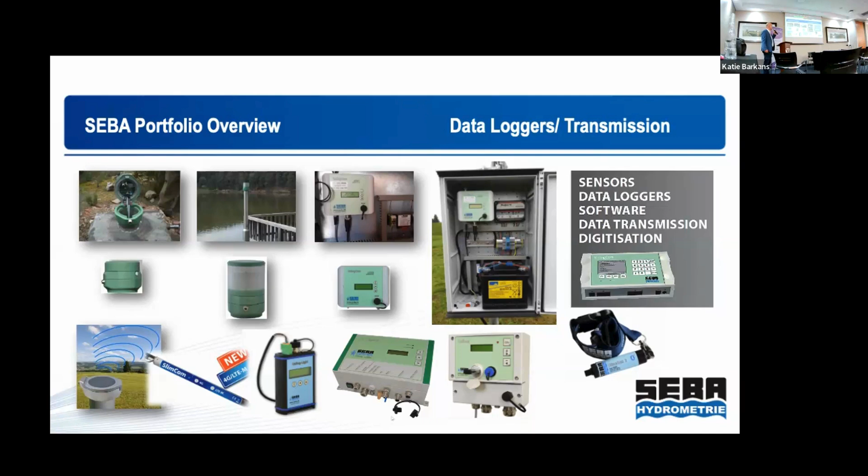We supply the entire chain of mobile and stationary equipment for hydrological regime, including different data loggers for the individual task, which all go back to the same core. So the software for configuration, etc., and operating the systems is common software for all of them. We work with World Bank, United Nations, UNDP, KfW, FAO, etc.

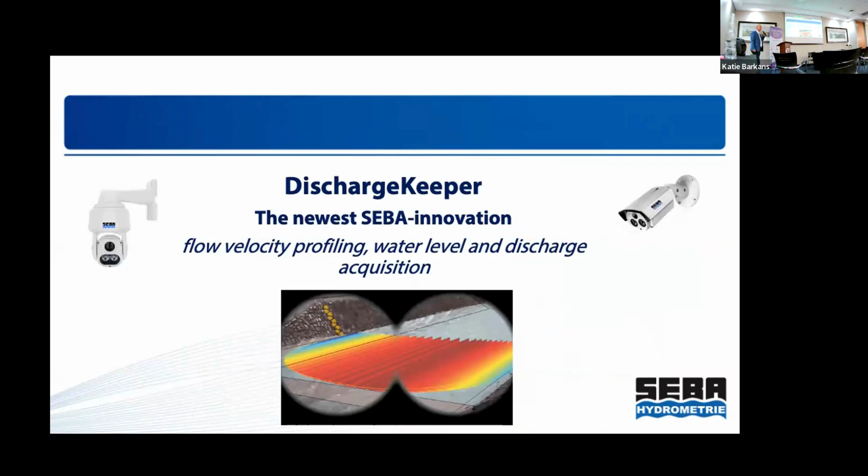The presentation today will be for a new system, a new innovation of our company, where we use a camera to execute the measurement of rivers, and we do one measurement in one step, which means detection of surface velocity as well as water level. And by observation with the camera, we detect the structure on the surface.

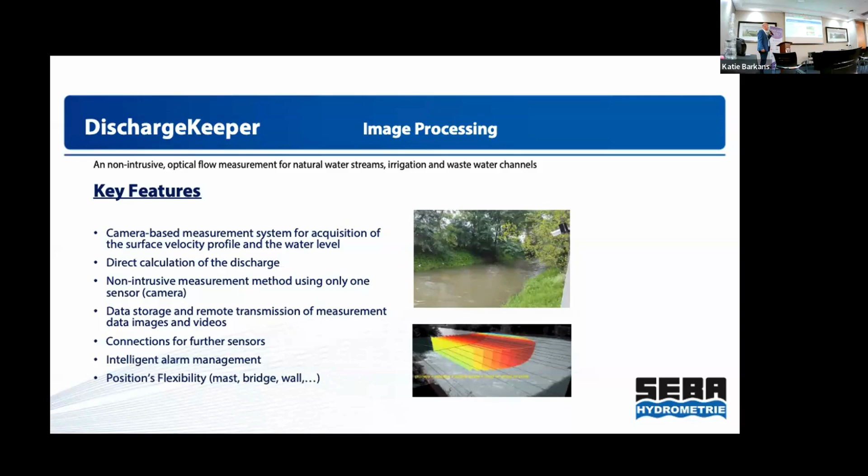So what is the key feature of it? It's a camera-based system, and it's a direct calculation of discharge at site. So we don't send the video streams to process them in a central hub. We calculate everything in the field, so the intelligence is already in the field, so that even if the infrastructure goes down due to a disaster situation, the system is going to continue.

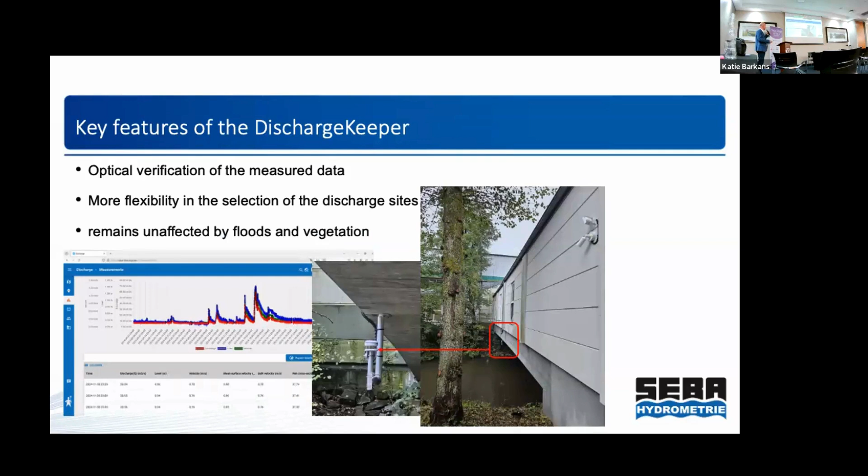We have the camera installed at the river, observing the entire surface, and therefore it remains unaffected by floods and vegetation. You see different reference points here, which are needed to bring the camera in position to have correct measurements in the cross section, and by calculating water level, velocity, and the cross section, we come to the discharge of the river.

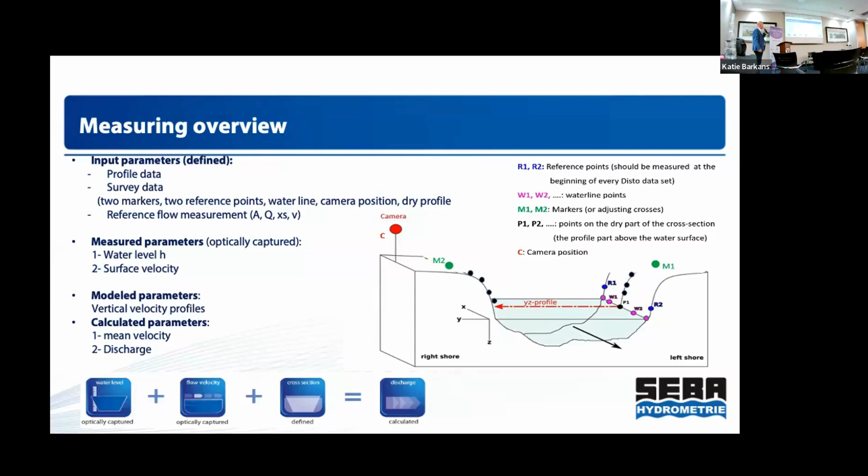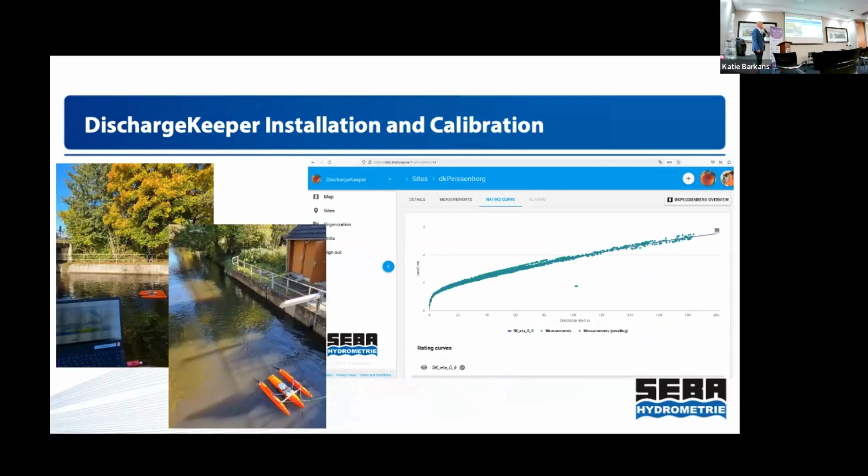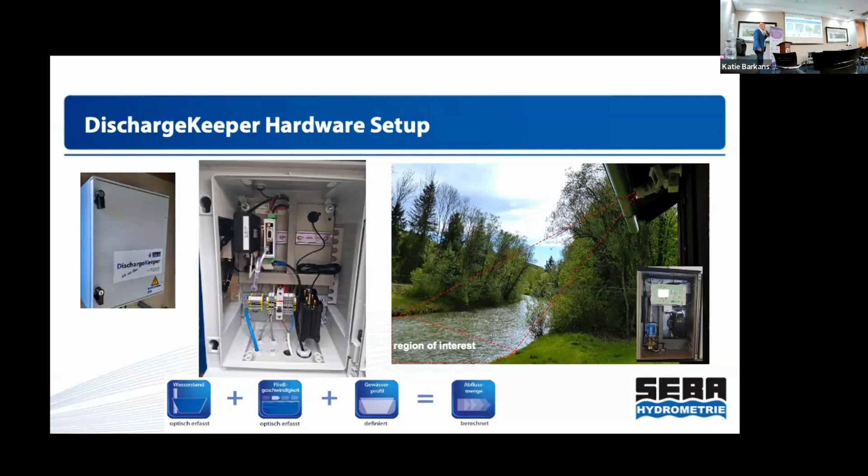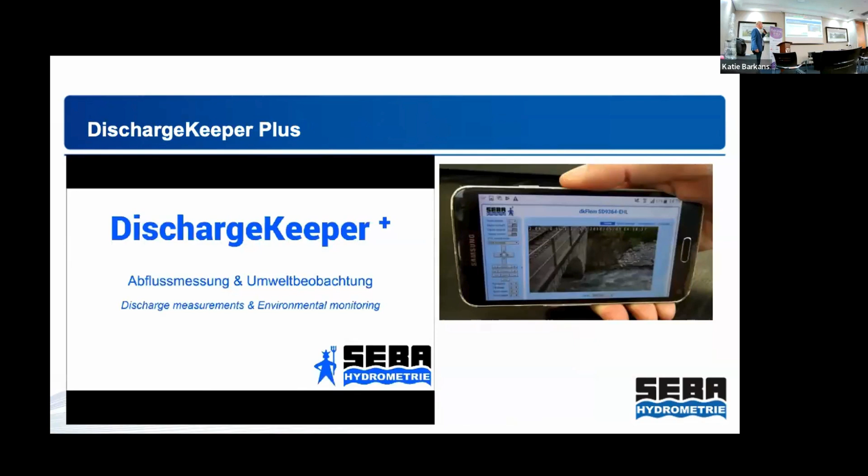It's quite a compact system, which does not necessarily need a power supply. It needs just a solar panel and a battery; it's operating on 12 volts. We have a lot of applications in between, around 200 units. You can also use the same system to observe the surrounding conditions.

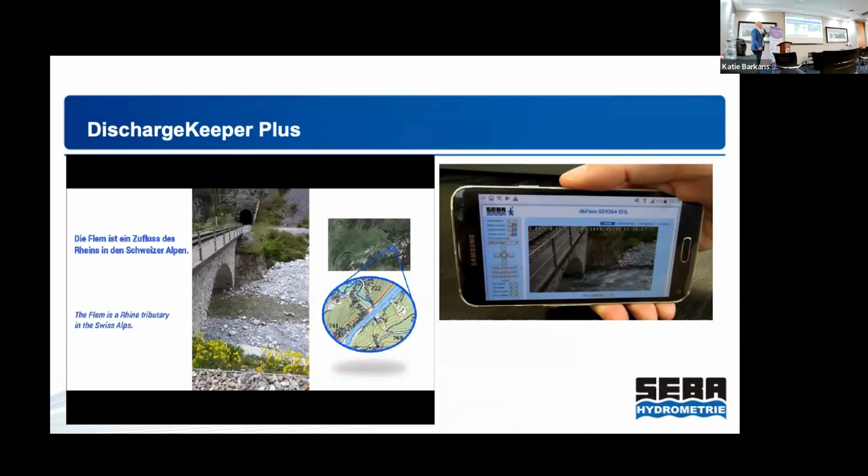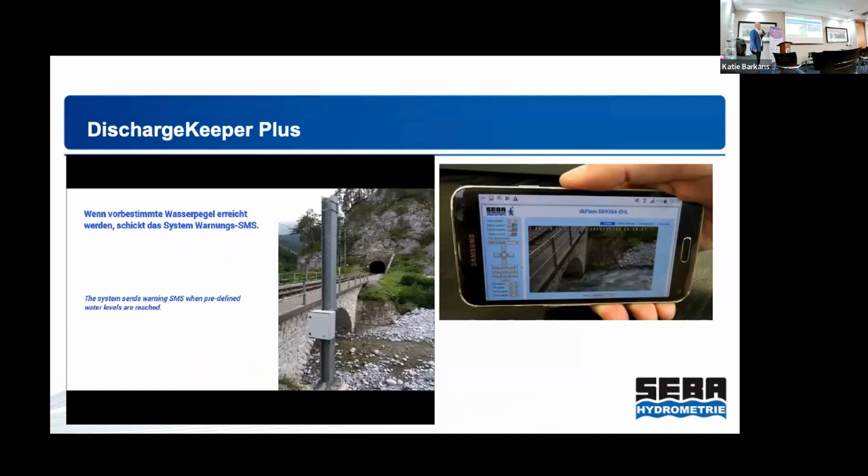So normally it is in operation mode to measure the velocity, but when you enter the system with your mobile phone, you can also look around and see what the situation is. Are there landslides? Are there heavy clouds, heavy rain? So all this can be observed with the same system if you just access it. It's measuring during day and night by emitting infrared light to the measuring cross-section.

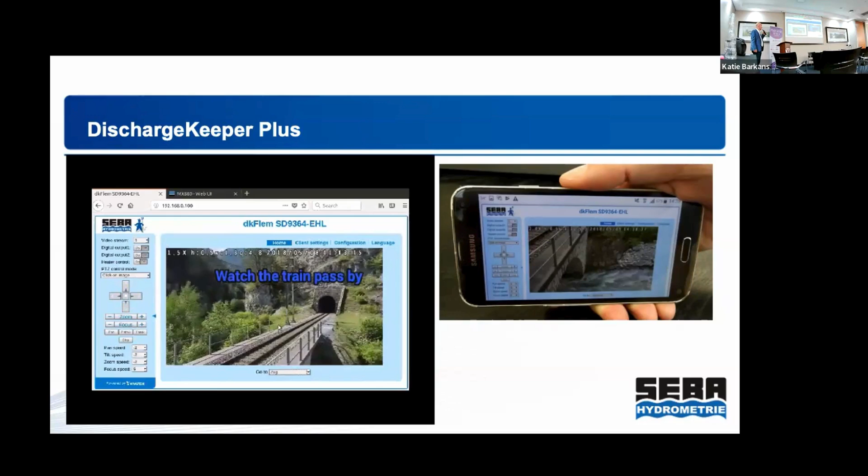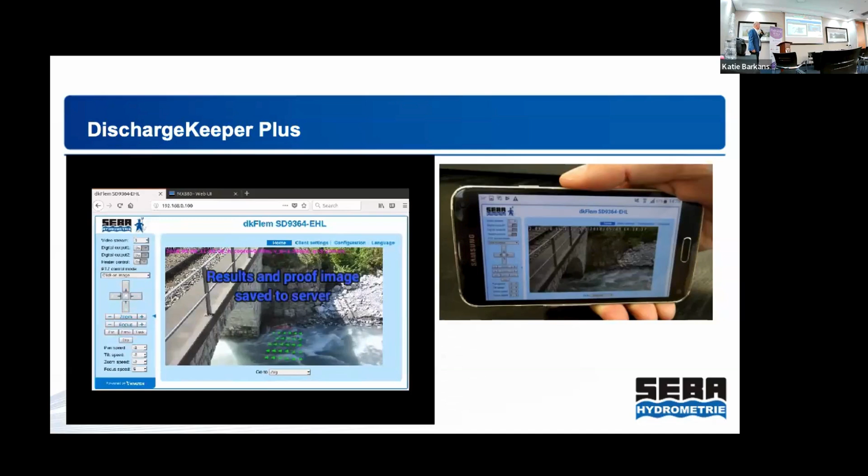Now you will see the system while the camera is moving around. You can zoom in, you can zoom out, and that way you have a multiple function of the system as such. In that case, it was an observation site for a train track, where for security reasons they wanted to observe it to decide whether the train should be stopped and the traffic should stand for a while.

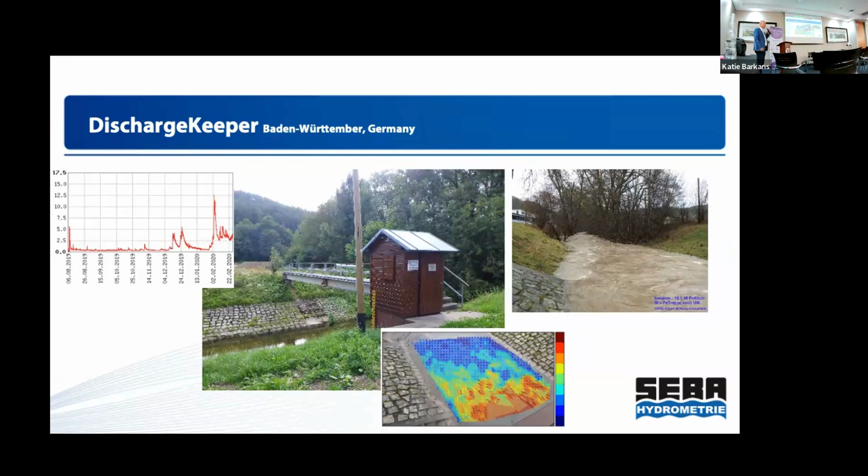Another example is somewhere in the southern part of Germany, where we detect the water velocity of a small flood, and that is the result of a measurement which you achieve at site. Another location, another river, another evaluation. As you can see here is the detection of the water level, which gives you a clear line between air and water.

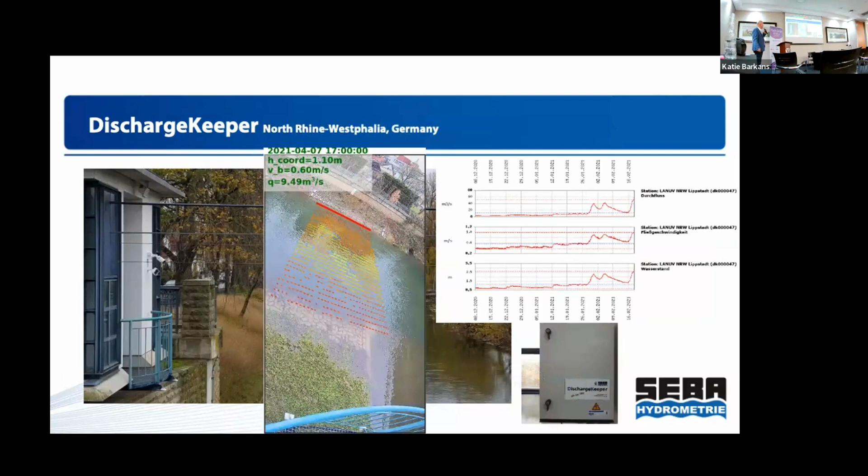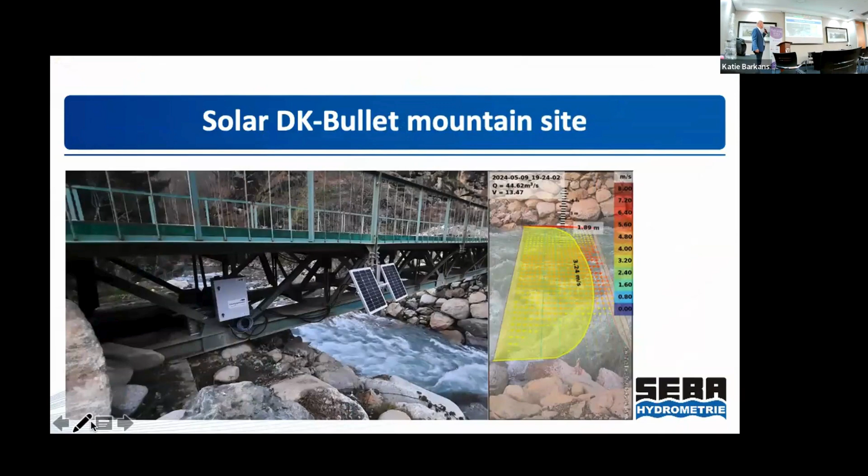Good. Here we are under alpine conditions where you have a lot of energy in the water. As you can see, it's a solar panel operated system. Here is a system which was destroyed completely. The radar sensor, which was implemented before, was gone due to an avalanche, and now it is detected by a camera where we measure the entire cycle. As you can see here, there is the measurement section, which is now in active mode.

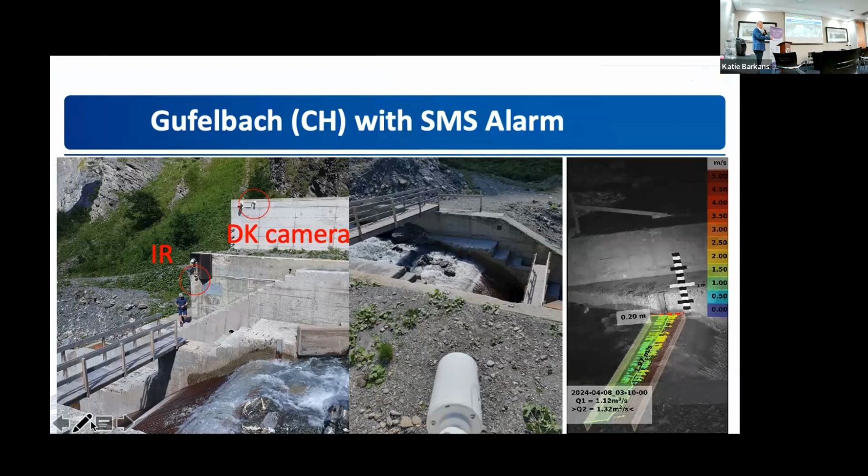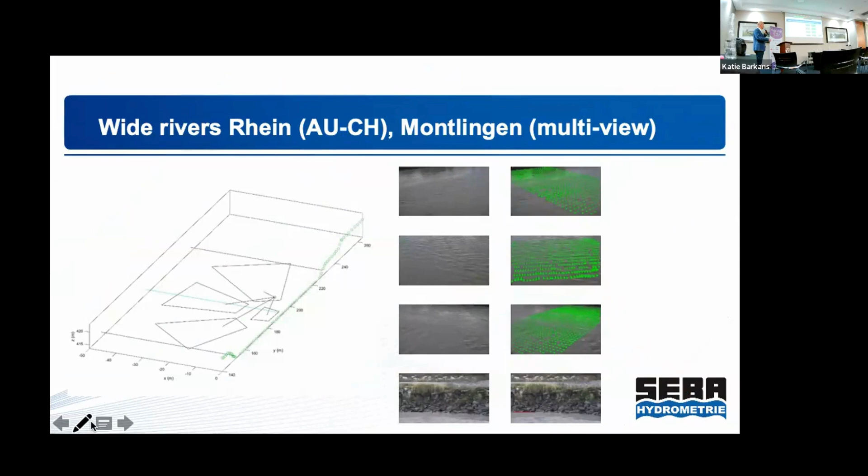We can also go to wide rivers. This section, for instance, is 200 meters wide, where the camera is installed somewhere in the middle of the bridge, and it is detecting in 3 sections by moving from one section to the other, and detecting the water level in one process, and then combining all the different individual evaluations into one image afterwards. That is the result, what you see with the 3 sections. And here is the detection of the water level.

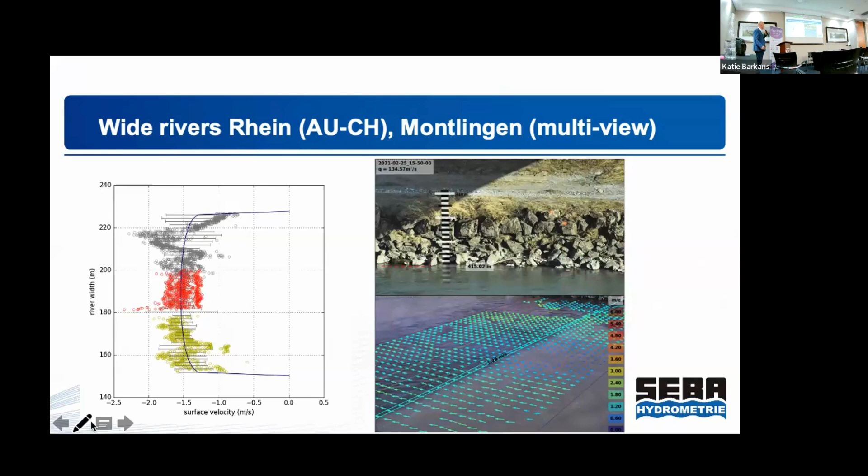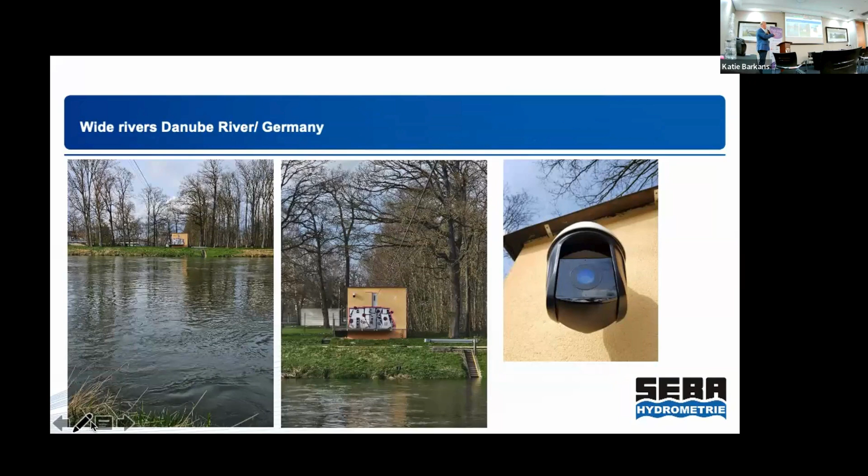Another location at the Rhine River, where we are about 250 meters wide, and so just another application. This is at the Danube River. You see how it looks like. Here we have the station zooming in, and the camera is placed here on the wall at that base.

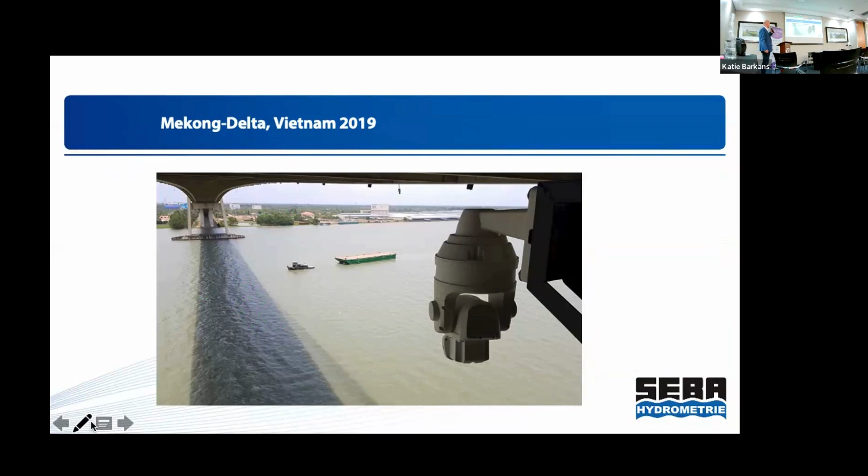This is one of our biggest applications, where we measure in Vietnam at the Mekong River, which is at this location about 600 meters wide. Again, the same evaluation and the composite of the different measurements.

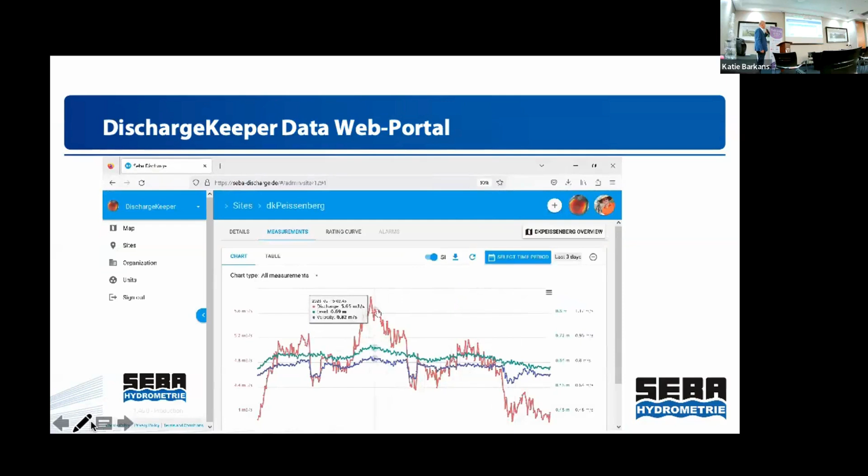And now we have access here to the web portal, where we do the evaluations or the handling of the data and the management of the data, where you can check afterwards the quality of your results.

Wrong button. It's me. My thumb is doing what he wants.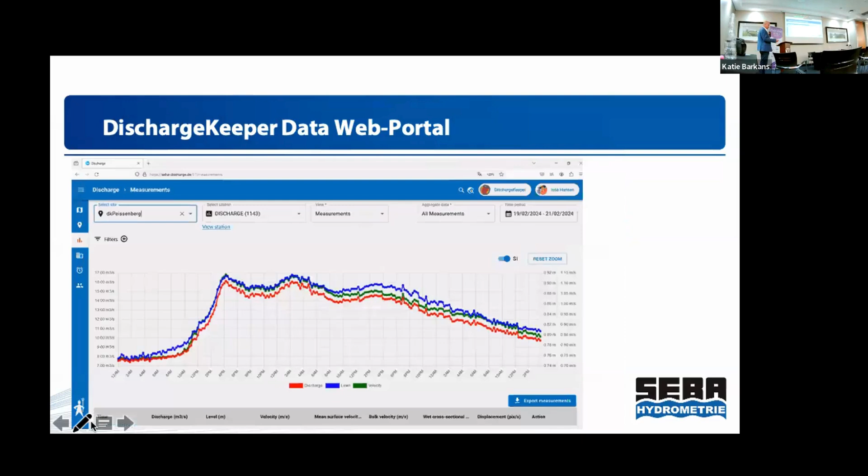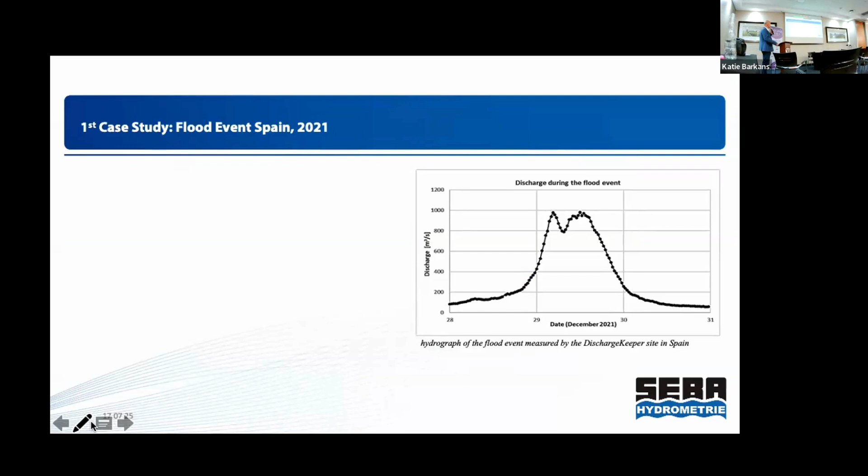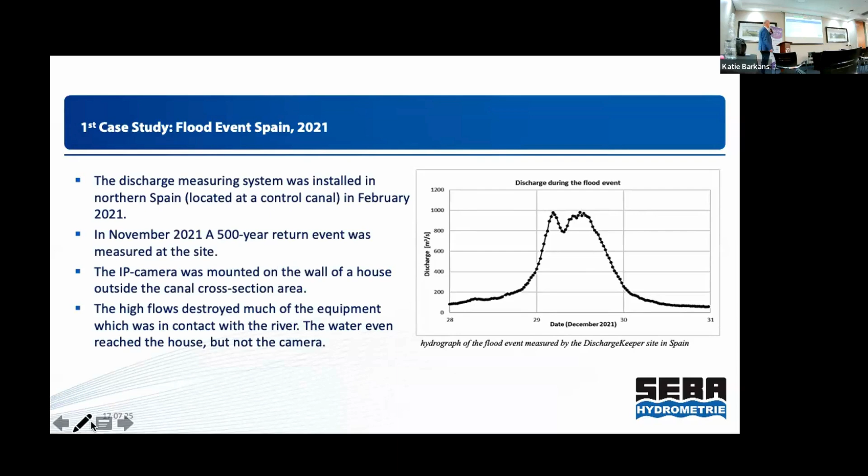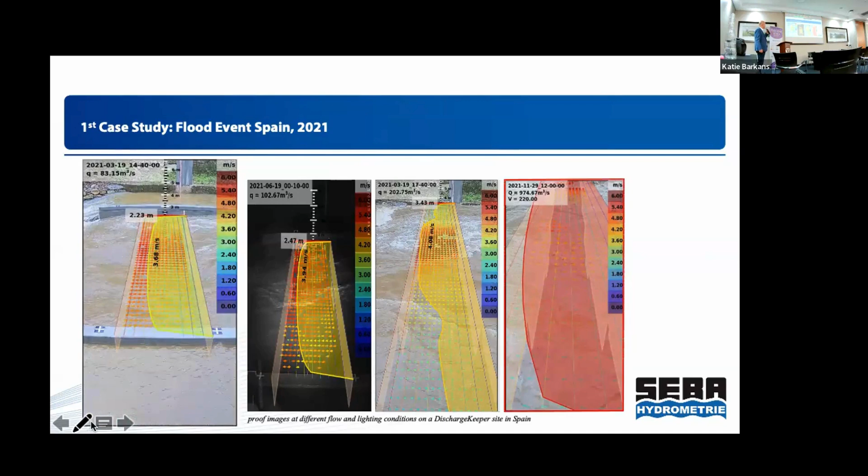So here you can see the development of the water level rising in the first event, which was still going only to that level. If you see this one, this was about 1,000 cubic meters per second, where afterwards the entire concrete structure here was destroyed. And we still have the entire cycle of that event, which was of course very valuable for the hydrologists to elaborate, because they didn't have the chance before.

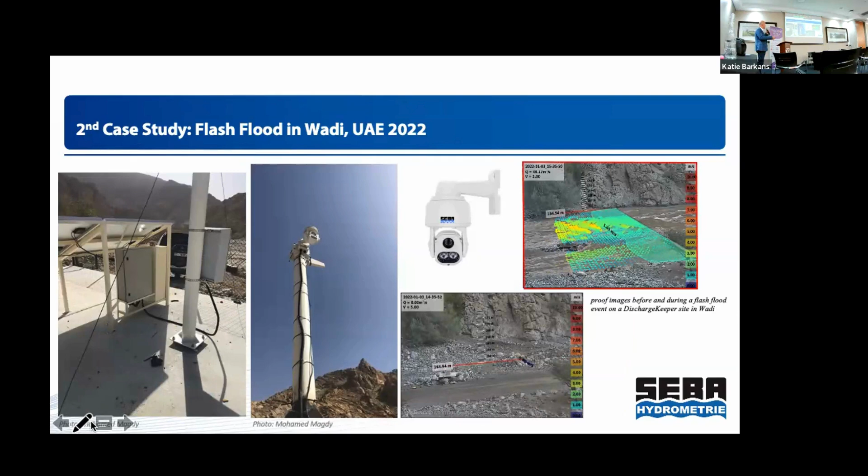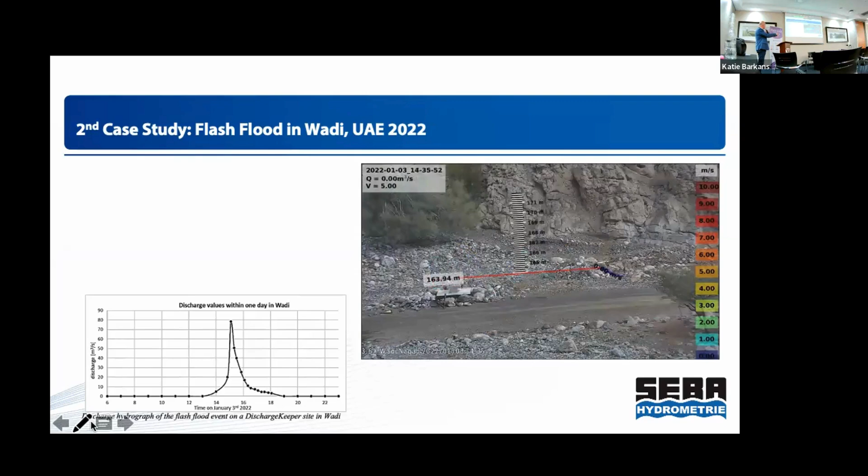Here's a second case study, which we did in the UAE. There you have the situation that the system is measuring and detecting a flood within a 15-minute cycle. And you see it was really a flash flood coming very, very fast and then releasing slowly. So the entire thing was going within just a couple of hours. So if you don't detect that with the camera, the information is more or less gone without getting further insight.

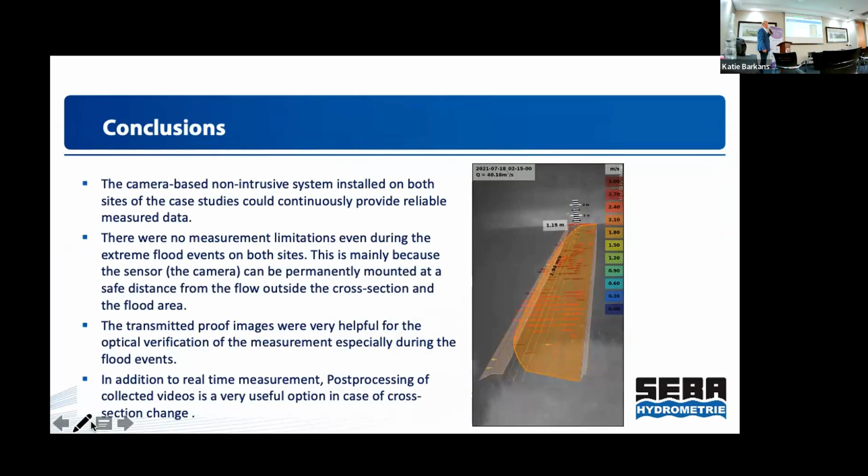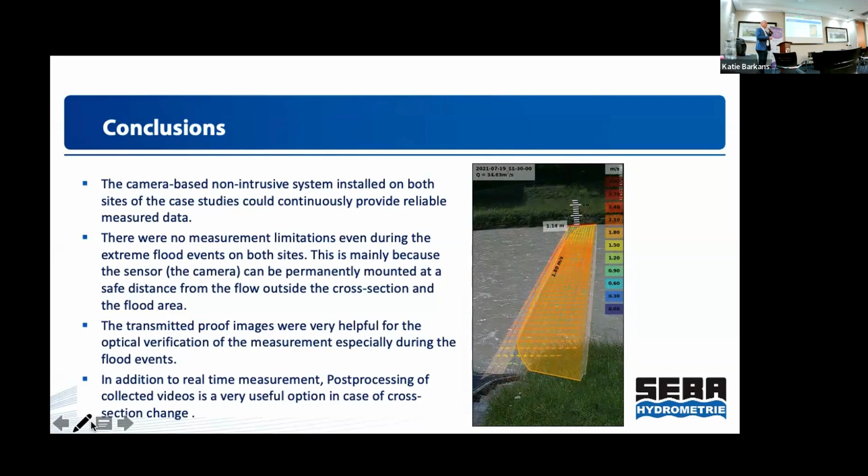So the conclusions: camera-based systems give you much more insight into the regime, also understanding the situation when a measurement is taken. And beside the measurement, we also transmit video sequences, or at least images. So you have total safety on capturing your measurements.

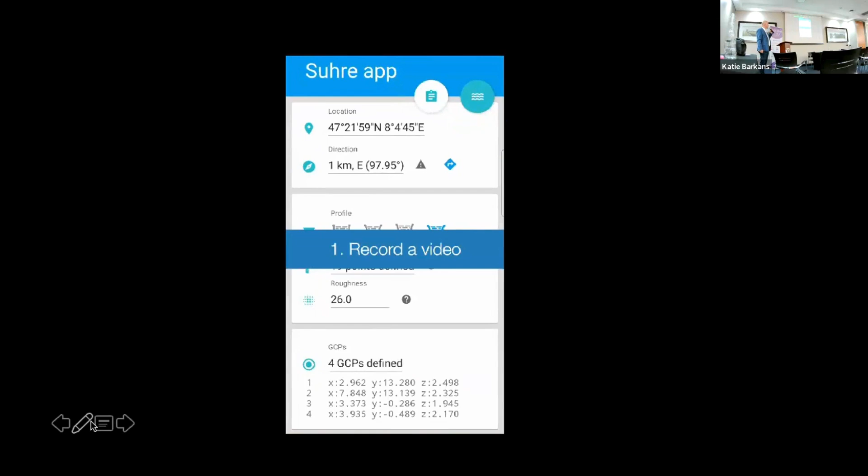This is the example of using the same algorithm as an app. So that means it's a mobile system. You can go to the site, which is pre-calibrated by the markers, and the system has the cross-section in the database, and every time you go there, it needs a 4-second video, which is recorded very fast. So after the recording, the evaluation process gets started.

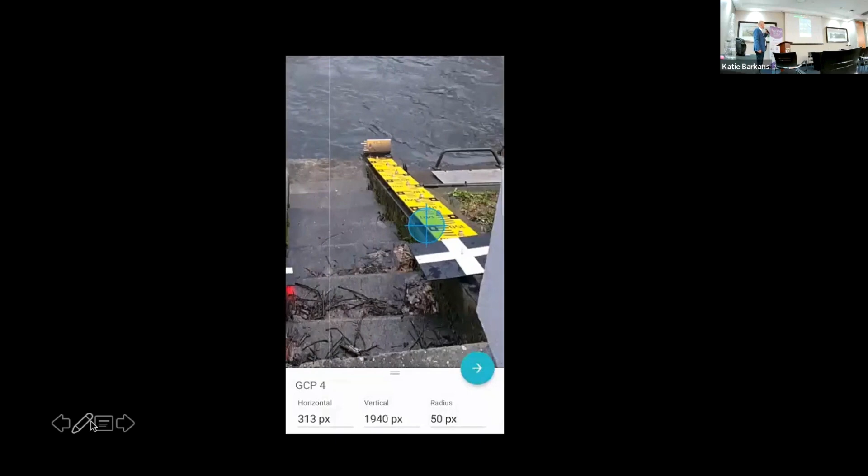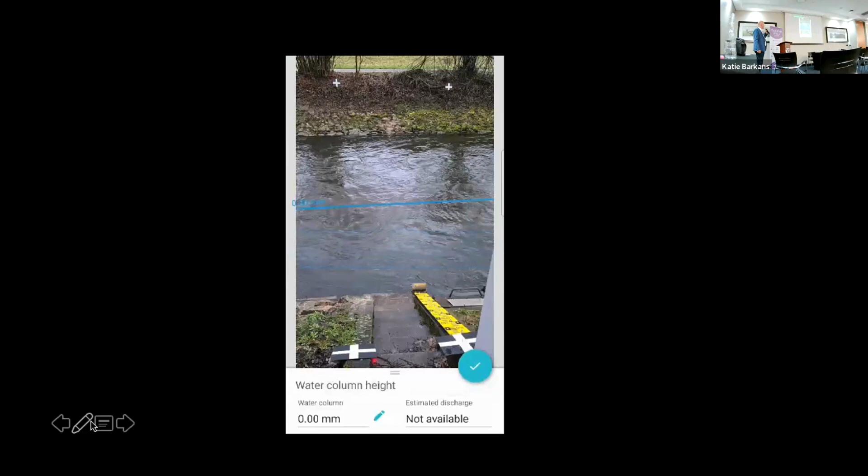Since you are not able to come exactly to the same position, we record the reference points one more time, and the geometry is known to the system. So then we start to detect the water level, and after that the video is processed in your smartphone. So you can even operate that offline. It is not necessary to have an online connection to a data hub.

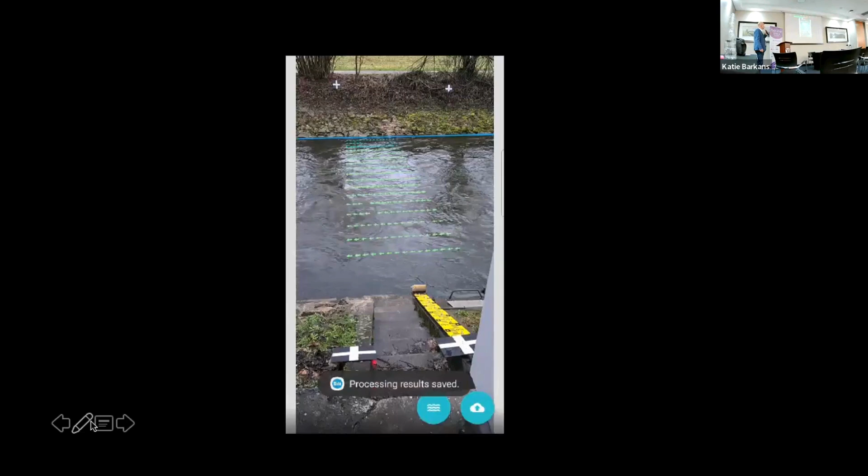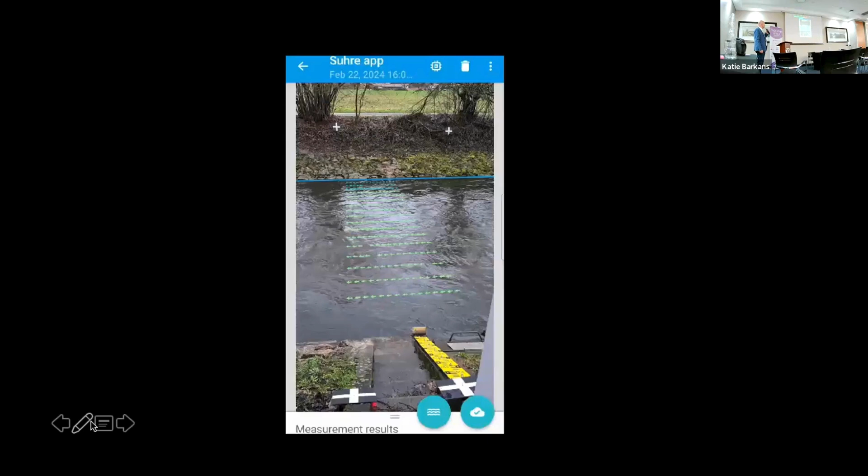Very fast results, which in some hydrological services is taken now as a reference measurement every time they go to the site, just to capture the information of that moment. So then the data goes back when your smartphone is online again. Then the data will be transmitted to the database where they are kept, and where you can use this information for further evaluation at a later stage.

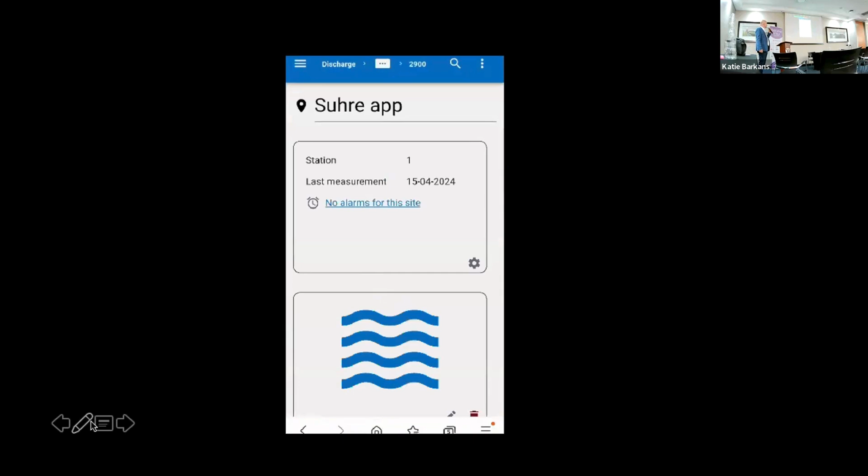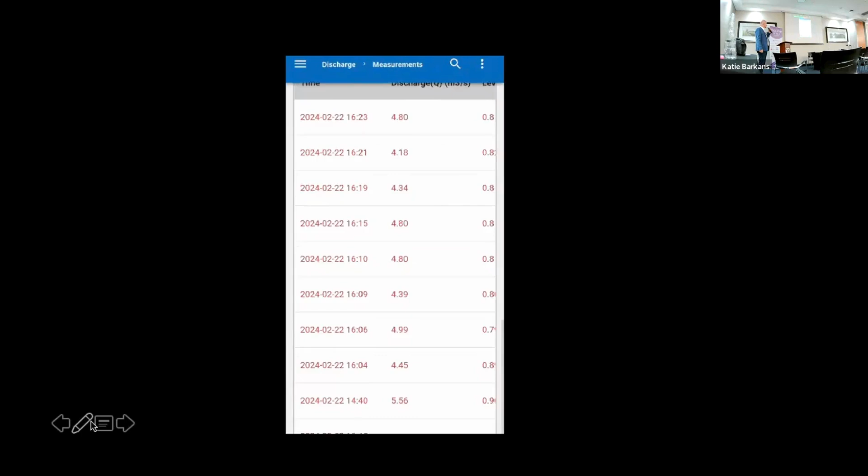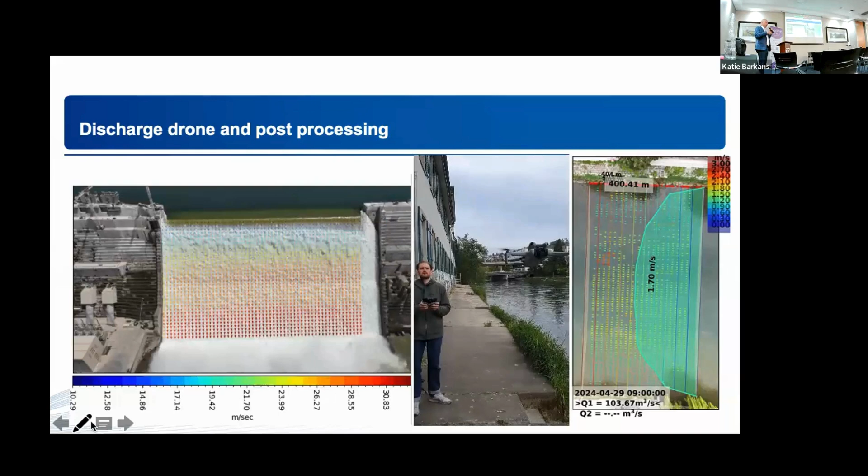So the location we have chosen here was in Suhr, and it is going through the different steps of processing. So all this information is in the database, and you have free access to that. This is also available as a free-of-charge trial for a certain period of time. The only thing, of course, is the calibration of the site or the preparation for measurement.

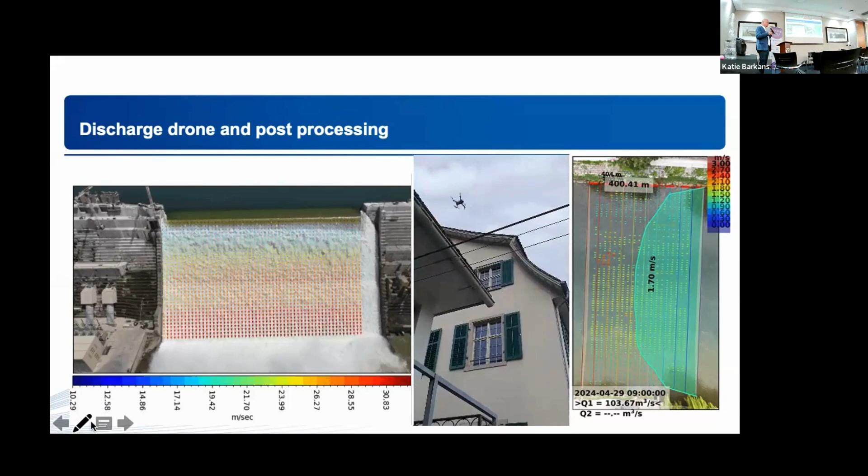We also use drones for doing the same measurement. So the most important thing is the calibration, or understanding the geometry of the site. It's even more important with the mobile system compared to the stationary system, since you are moving, not finding exactly the same spot. So for you to come to good results with the mobile app, it really needs some training and preparation. But once a station is prepared, you can use this information.